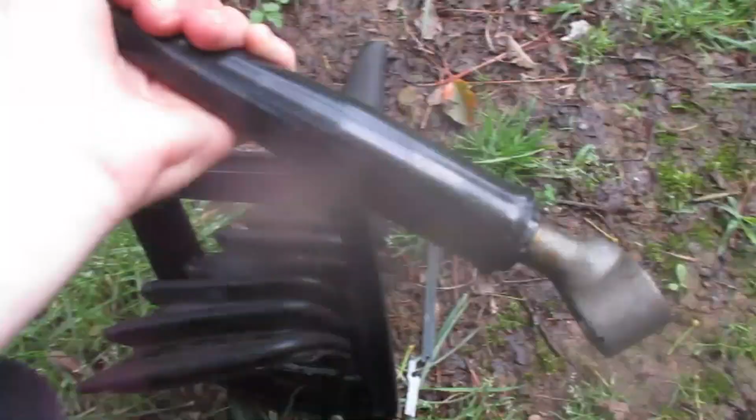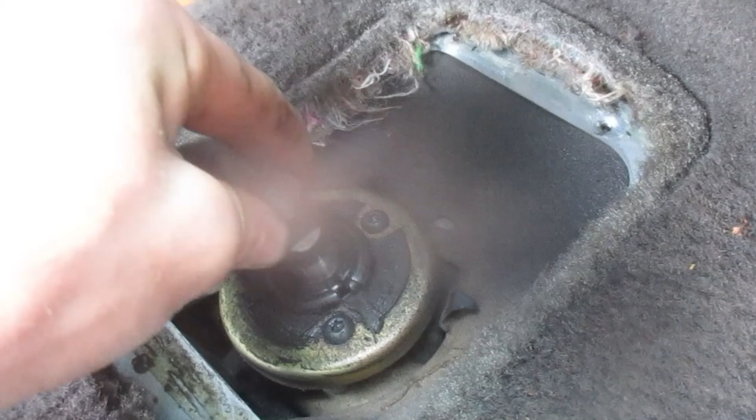And the shifter was attached with kind of an interesting system. Oh, so here's the rubber underneath the boot. The transmission, you can see it down there. Anyway, this goes on like, let's see. Why is it tipped like this? Am I doing it? Oh. Anyway, so it goes on like this. Yeah, look how sloppy. I heard there's plastic bushings in here. That's probably the problem. Look how sloppy that is. Probably just needs new bushings.

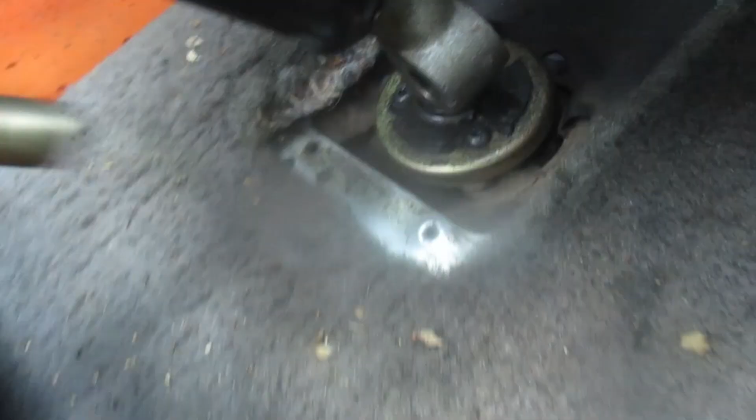Anyway, so this sits on there like this. And this bolt with a wedge on it goes in there and locks it on because there's a flat there. The bolt with the wedge was in there. The nut was on the other end, pulling it tight, but you can move the nut to this end to pull it back out. And then the shifter comes off. So there we go. And I suspect this is a problem. See how sloppy that is. Got a cracked little thing here. And there's the pivot on the transmission.

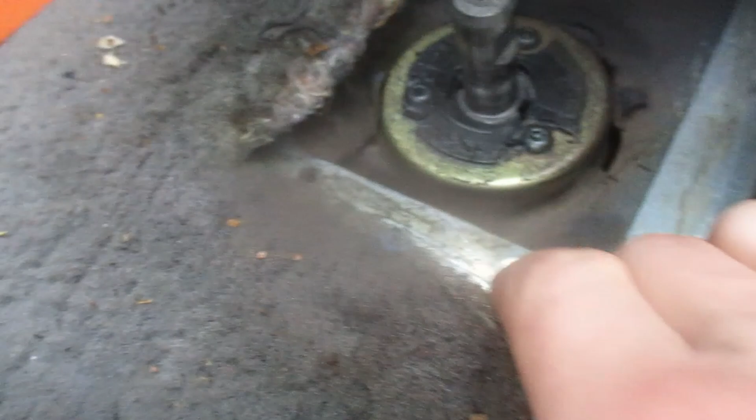Yeah, that is pretty bad. This might be why it's not sitting. We have got a plate down here though, so I'm not sure how much we can do without pulling the transmission out. No, it's a bolted on plate, actually. I'm gonna get off this carpeting. And possibly that plate will provide enough access. I'm not really sure. Let's see.

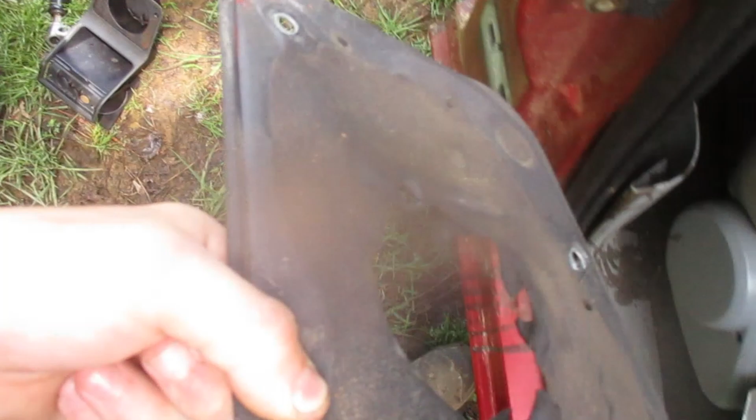I got the cover off. The one right there, I think that must be the transfer case lever hole. I'm not sure. I was thinking I would be able to get to it, but I just got all this here. The plate reaches more into there. We really should have put it more here, because we can't really pull the plate off unless I can just access through this little spot. Else I'm going to have to drop the transmission. Problem with that is I don't think I can do that. Not by myself, anyway. So this could be pretty problematic, but I'll see what I can figure out.

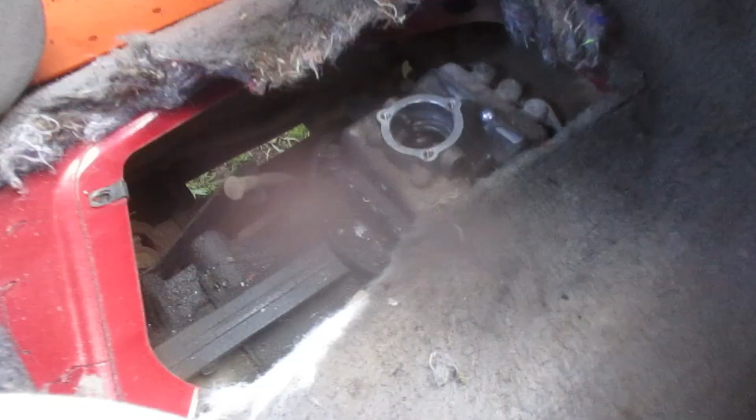So I got that piece off, and I really can't tell. There's no way to get this cover off without removing the transmission, so I guess I'm going to pull it out in a little while and replace it. Get another good used one and put it in. It's no big deal, but I'm a little disappointed.

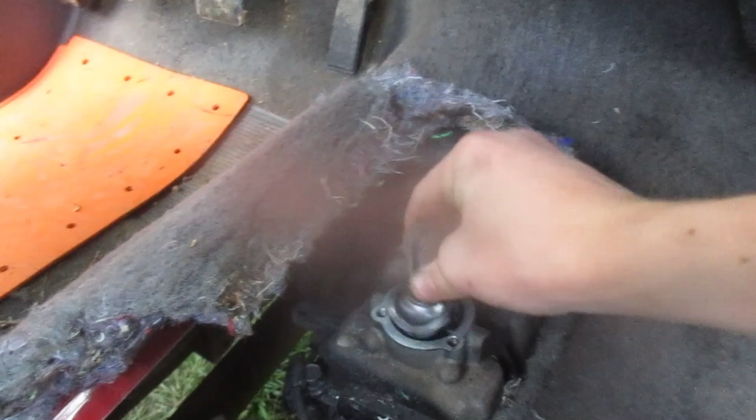I stuck this in here and then screwed down that on top of it and just started hitting it with a hammer, and I got it broke loose. The oil's really low in the transmission. I'm going to change it and see, Lord willing, then it won't ever break up again. I'll just add the oil to the top. It's easier than using the fill plug. Have to get some oil soon, and Lord willing, this will fix it.

I got some oil ordered, and we won't be able to listen to it tonight, but I'm going to go ahead and put on my custom exhaust. You know, the cheaper they are, the better they sound, so this one ought to sound pretty good, because I think it was so cheap. Yeah. I can't tell if it's good or not. No flex pipe, I'm not using any of that. I don't want it rusting like those are supposed to do.

Okay, let's start by getting my empty catalytic converter / adapter thingy. That might actually muffle it a little, which would probably be good, considering that it's area for the gases to expand or whatever. Let's go and get it clamped onto here. There's a 2 1/4, so it'll fit right inside it.

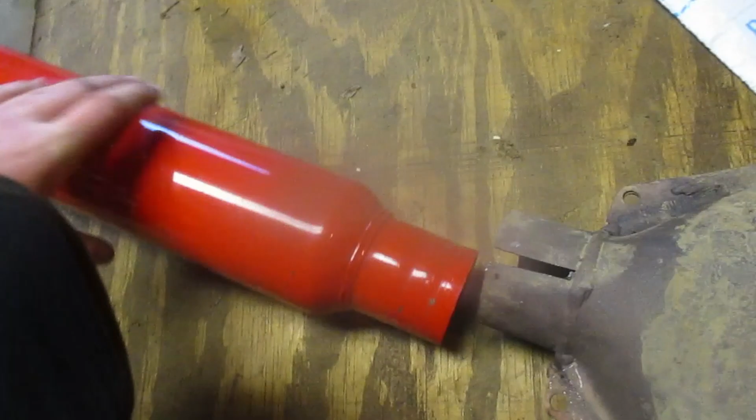Here we go, got these clamped together with this old clamp. It originally went right there, actually. It has that hook for hanging it on the hanger that's over there. So I got this glass pack from my cousin. It's 2 1/4 diameter, but that turned out to be good because it fits inside there perfectly.

I cut a slot here. Good thing I did. See how much it's closed. And it's clamped on there real secure, so we got a straight through exhaust. With an echo box there that'll actually quiet it down a little bit, and the glass pack to quiet it down some more, and it all sounds pretty good. So I need to figure out how this all is going to go together, I guess.

For some reason that hanger didn't line up up there, but it's no big deal. This, I believe the gasket's still good, so it shouldn't leak. So let's see what we can do. Got it in place. It's so tucked up in there, somebody randomly looking under there wouldn't even notice it. Let's see. I use my camera as a handy viewer. Let's see.

There we go. Now we put this in right here. And we got an extension here. That's not even the noise it makes. Anyway, let's see. So after this, we'll have it like this. So, supposed to do it like this and not use that. Like that. Maybe. I don't know, let's see.

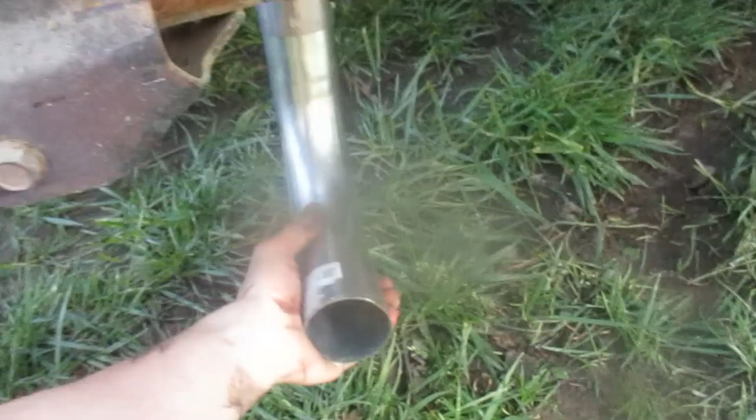See if I can put this on underneath. I'm not sure, I might just reduce my ground clearance way too much. Wait a minute. Yeah, that would certainly. Some cutting is definitely in order. Or I could just have it be like a Honda Civic or something when it's sticking up, except that this is the side. So, anyway.

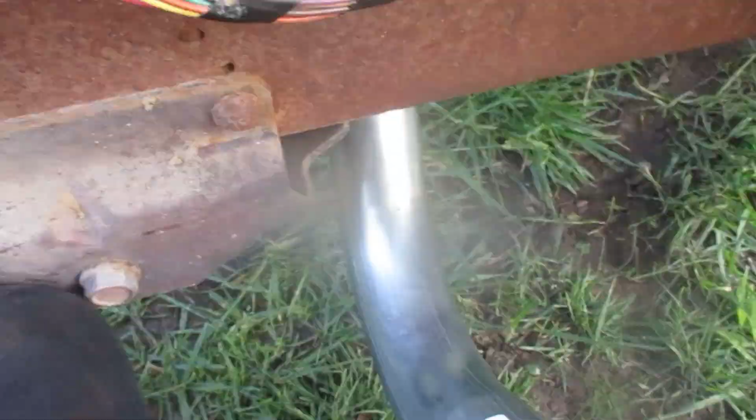Let me see, I thought about just not having this one, and just having the one behind it just dumping out down there, but I'd rather have it come out a little further. What I really should have bought was a 45-degree angle, so I could have it come down like that, and have it come out, yeah. I should have had a 45-degree angle and not 90. That's it, I guess I'll have it come out like this and then just cut this one at an angle like that, and that'll be the end of it.

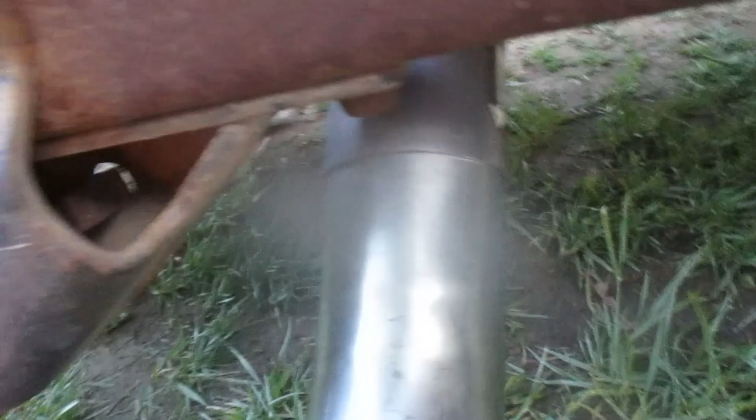Alright, that ought to work. Guess I might just screw it on. I don't even know if there's any point in wasting a clamp on this. Of course I have the clamp, so I may as well use it. I also need to figure out some way to probably hang the exhaust pipe right here, I guess, or something. Alright. Well, that looks pretty sporty. I just need to bolt everything together now. We won't know how it sounds for a couple days, but I've got the exhaust system installed.

So, it's a little loose at the connection between the fake catalytic converter and the glass pack, where I used that whole clamp. I think it's tight enough. Time will tell if it holds up for sure. At the back, we needed to make sure that we had an exhaust hanger, so I used the proper kind. This is the orthodox traditional exhaust hanger. Also known as a coat hanger. Hangs good, and it'll blow out right there.

That is stupid muscle car noises. Oops, I shouldn't have said that. I'm very, very sorry. Yes. Anyway, yeah.

So my curiosity got the best of me, and I decided to go ahead and see what the Explorer sounds like. And it sounds pretty good. It's not real loud, but it sounds good. I didn't want it being real loud and obnoxious anyway, so it's perfect. Sounds sporty. All the exhaust is blowing out the pipe. Isn't this a sporty exhaust pipe? And all the exhaust is coming out of it, feel it.

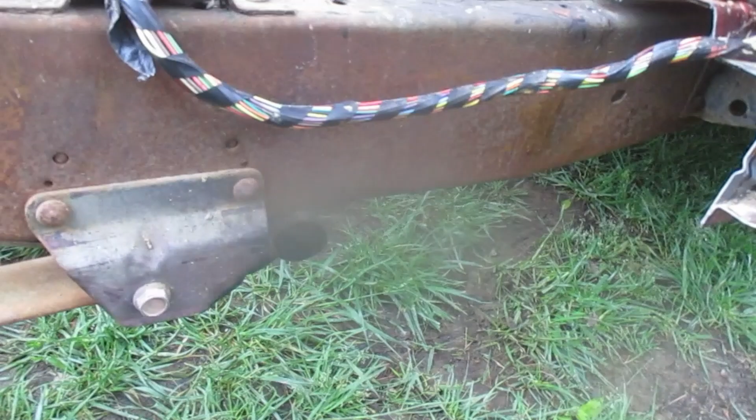Harry's got some parts. And here is his good pal Carlos. Carlos is a Chevy Express. Doesn't he look great? Anyway, let's see. This is our first shipment. Cardone. We build it better. Remanufactured unloaded power brake booster.

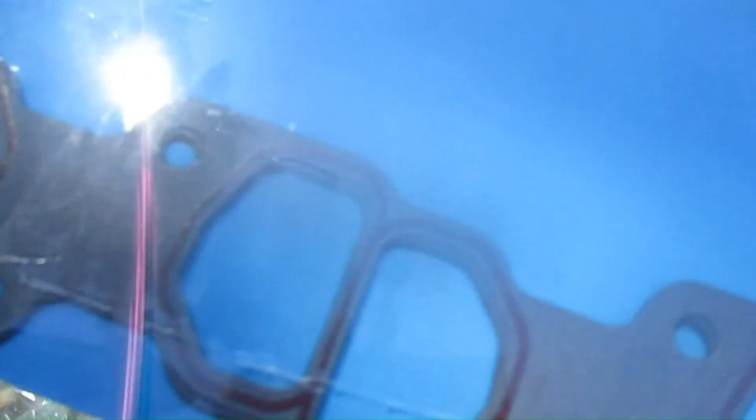How is it unloaded? What is this? Oh, this is gaskets from when I replaced the fuel injectors. And this is a repair kit for my shifter. Let's look at our brake booster.

Why is the box so big? Here's our... warranty void if check valve is removed. Good to know, I wasn't planning on removing it. What? Failure to replace the leaking master cylinder will void warranty. That's a good idea, I think, about that policy. But my master cylinder isn't leaking. Here it is. Cool.

What is this plastic for? We got more warnings in here. Check. I've not got 1.5 hours. I don't know if it's gonna take that long for me. And what is this? Warranty void if unit is contaminated by gasoline fumes. I haven't got rich mixture. So how am I gonna do this?

I was in the middle of trying to figure out why my radio is having all these issues, and then now all this stuff shows up for Harry. Harry is the name of the Explorer. Well, I'm just gonna get distracted and start working on Harry. There's our transmission. I'm just gonna add the oil through the hole in the top. It'd be easier than doing it through the side when I give it a change.

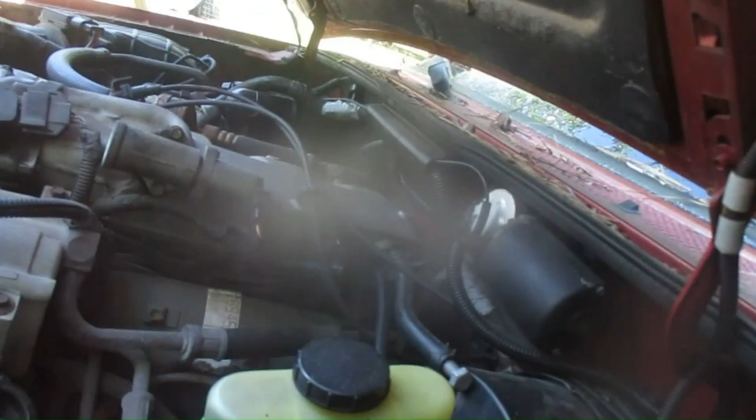Pop the hood. There we go, my hood is open. Yeah, let's get started now, I reckon. Get started with replacing our brake booster. Fuel filter just showed up. I need the injectors and the fuel pump to show up, fuel pump and sending unit assembly, and then we'll put them on. I'm running out of time. I'm grateful I got all this stuff I need to put on.

I am gonna go and fill up the transmission with oil and install the shifter kit before I put on the brake booster. Do that, then the brake booster, and then what was the other? Oh yeah. I don't guess I'll be able to do anything more on him until tomorrow, apart from drive a little. I don't know how much gas I got left in there. Probably not much.

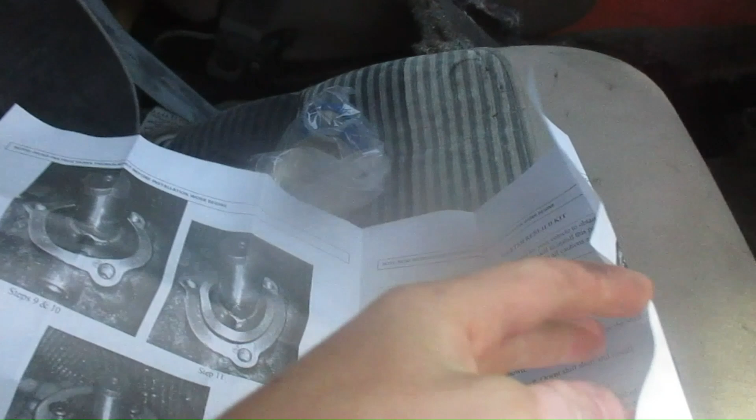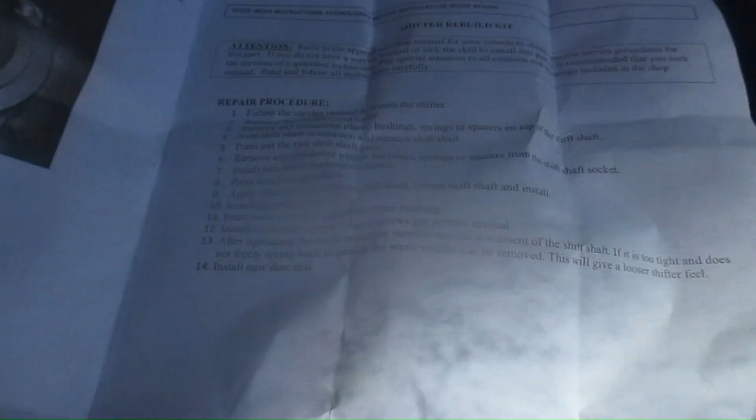Okay, let's get started. First I need to put in all the fresh oil. I'm not going to bother with replacing those pins, so we'll just flush it out. Got some fresh Mercon LV automatic transmission fluid. Doesn't make any sense putting automatic transmission fluid in a manual, but it's what you're supposed to do apparently. Pour a little oil in through the top and it's dripping out the drain. You're supposed to add through the fill hole. That'd be really hard. It'd be much easier filling from inside, and then I'll just fill it till it starts dripping out the hole. And then put together the shifter rebuild kit and put the shifter back on.

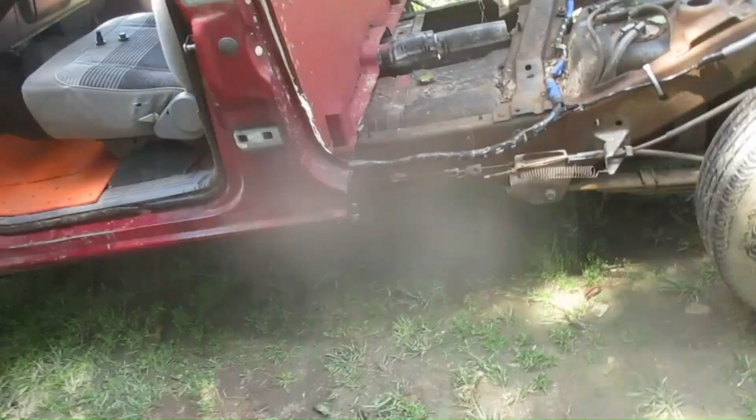Long run, the transmission will be fixed and I'll get a while out of it, a couple more 100,000 miles. So I expect I probably will. These are great trucks, great engine, great transmission. Only seem to have got like 1.5 quarts out of that transmission. It was really low. I looked for oil seepage on it though, and I don't really see any. Unless the front seal is shot, that area in the engine's pretty wet.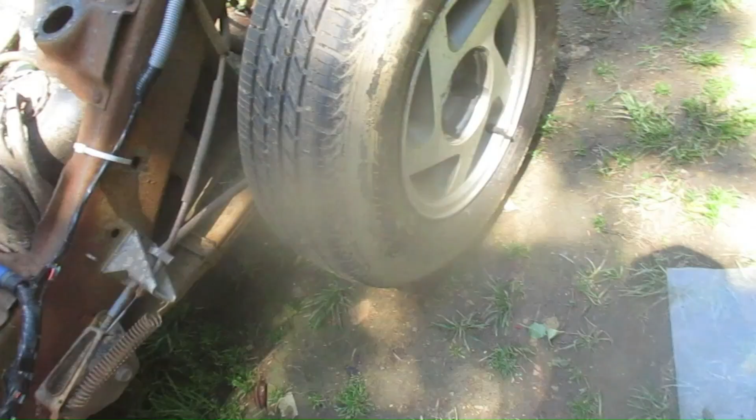Well, that's not the case. That would not be easy to change. I don't see how I get this thing pulled apart. Have to pull the engine out, probably, because it's not easy to get the stuff under here. That's a fact. I felt some, then stuck my finger in and felt, and it was almost full. And then I put in a little more, and went back and it was running out the hole, so hopefully it's not really overfilled.

I put the cap plug in. Filling it from the top makes it easier to access it, and that wee bit of oil I put in ran over the shifting stuff like that. It's at the top, it's filled up, it's good. Okay, let's put the cap on the jug. I need to get me one of them pumps used to fill it, because I think the transmission must leak a little.

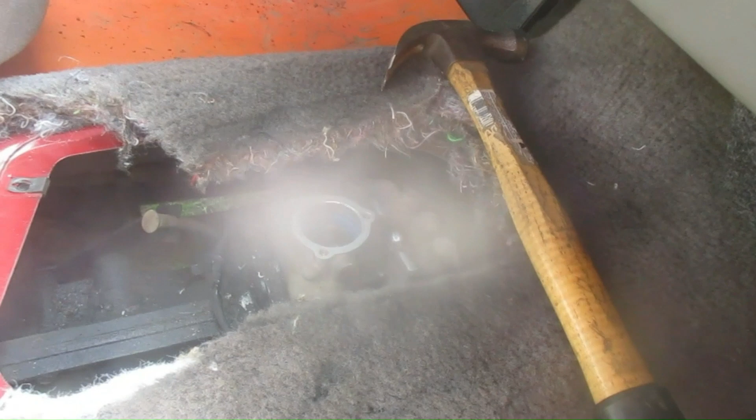Since I can't get those pins out, really, it was kind of tricky to get at that and get that into there, but I was able to bend it into there without hurting it. Okay, where's our shifting ball? Yeah, this pin's not really worn anyway. Let's see. I can go in there like this. So I slop it in, it's just to grease it a little. I gotta go find some. Maybe just put some oil on it.

In the upper bushing in this spring, it says to take this spring out if the shifter feels too tight. And then we have a new plate to put on. Alright, so that boot was already coming off, so I just took it off and put that back down to help hold down the carpet. Can't really tell it was cut, I don't really care. And here we have our shifter. It shifts pretty well. Big improvement for sure. I cranked that. Alright, that's sporty, ain't it? I need to get my console put back in.

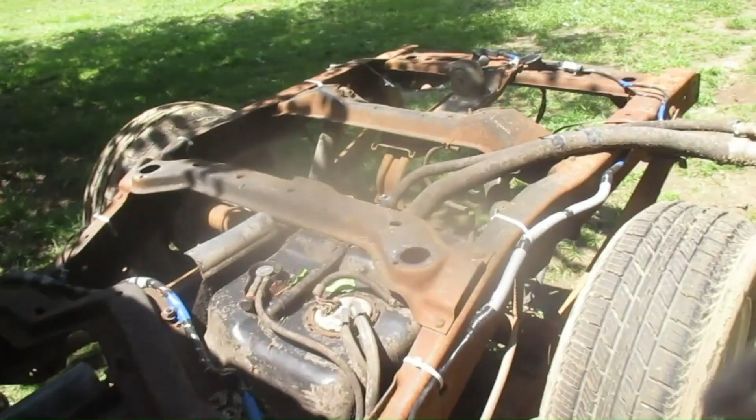Alright, so I finished the interior reassembly. Now I'll move on to replacing the brake booster, and after that, we'll do a little test driving. And then, Lord willing, tomorrow, the rest of my fuel system components will be here, so I can fix up the engine and get it running good. And then if he runs real great, it'll be probably pretty much. I might have to replace a couple more things, and then it'll be flatbed time.

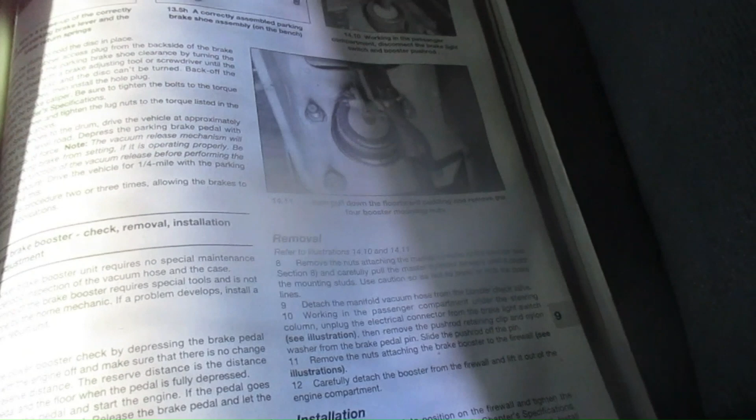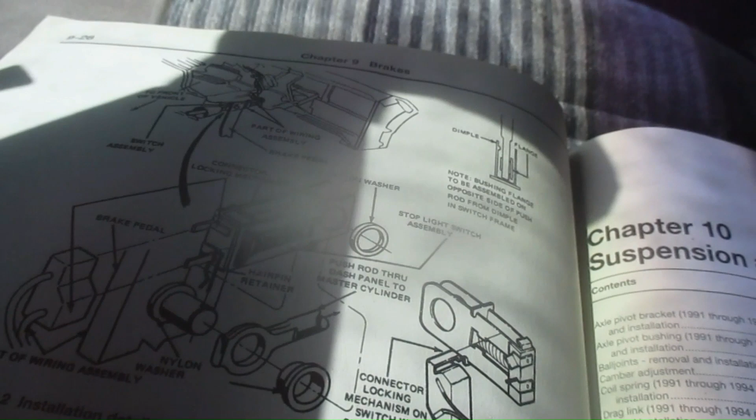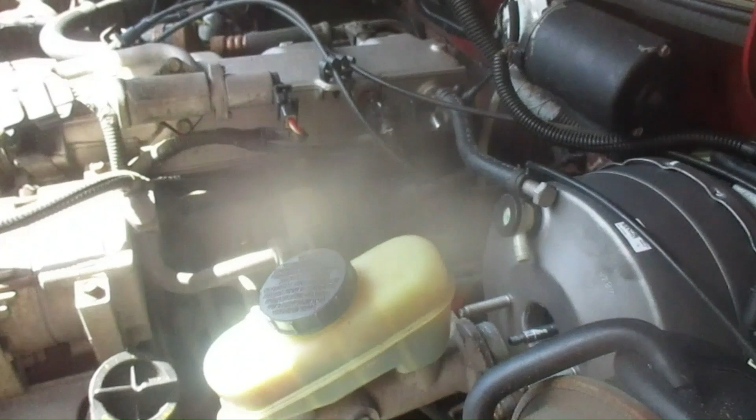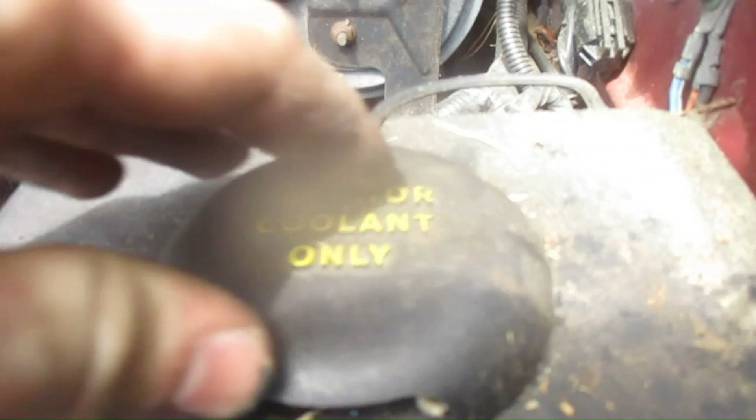Now it's time for a test drive. Of course, I need to do all the engine work, but I don't have those parts yet, so I want to make sure that what I have done is working good. See, we still got some coolant in there. This oil is good. Yeah, it looks good. There. Hey, that's something good. That'll be alright.

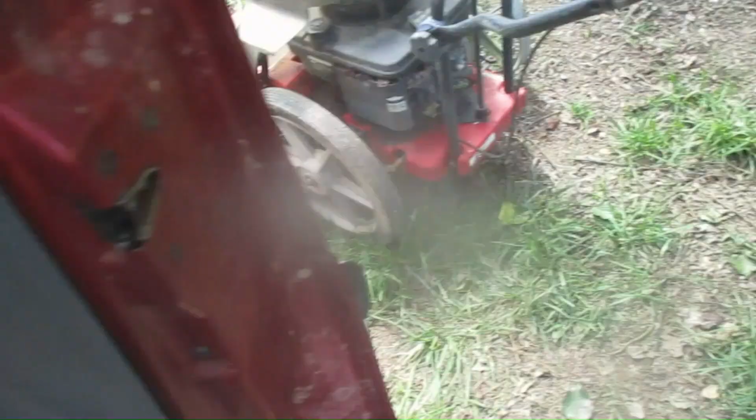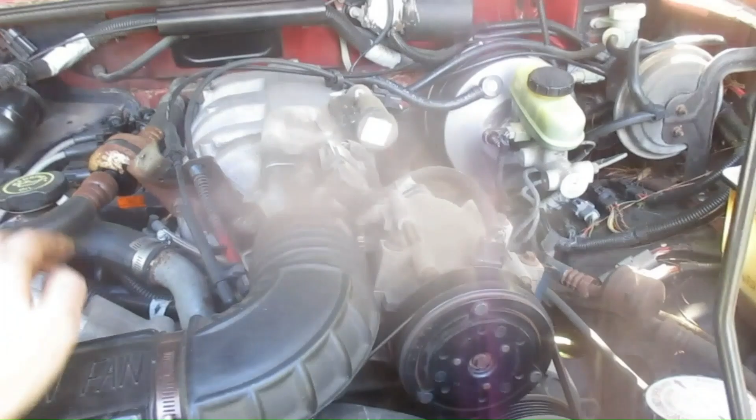Well, my brake booster will boost the brakes as it should. Our transmission will shift as it should. Of course, I can't make video while I drive, so I'll tell you the result. Harry just been for a ride. Even without new fuel injectors, he rides pretty smooth. So I guess with the new fuel injectors, he should run even better. Sounds very powerful, and he only has 155 horsepower. The good old V6. I like it.

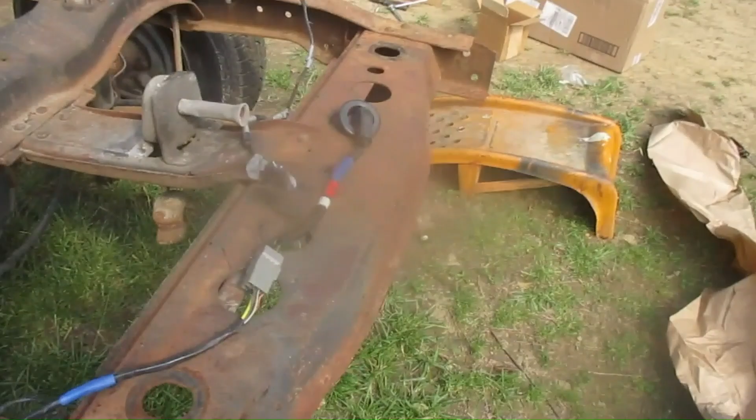There's the fuel injectors in a container. He seems to shift pretty well. I was going up the driveway and my shift knob flew off, so I had to glue it back on. But anyway, he shifts pretty smoothly. It sounds a little grindy, I noticed, but that don't mean anything real bad. Let's see down there. We don't really see any seepage from the transmission, it don't look like. Well, it's alright. There's a lot of oil seepage here, so we probably ought to keep an eye on the oil in there. Well, seems good overall.

Thankfully I remembered this. Praise God, I remembered before I took him for a drive. But the clutch pedal had fallen off the push rod up there. I put a cotter pin on it. I guess it doesn't have any bushing in it, so it's pretty sloppy. Like the bushing's just long gone. And I expect it should have had something holding it on, of course, but it's gone now. I just had the cotter pin that I put on it.

Fuel injectors. I think that I probably should not be opening them up in an unsanitary place like this.

Hardly even need new fuel injectors, as best I can tell, but I think you probably would benefit. Fuel injector, return all units in this box. Yes, I will. So look at one. They got it packaged up real nicely to keep it dry and safe. Here we have our fuel injector.

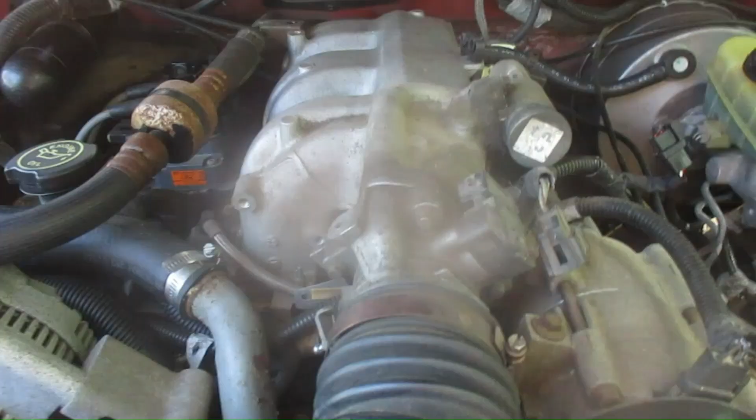I'm getting the intake manifold removed. There's 6 bolts, nuts, that is. So you gotta take out one there, two there, and one back there. That one back there is tricky to get out, but with the right socket setup, you can get it out. And I had to disconnect the connector there, all those hoses.

And of course this hose, a hose down there, that little one, you can probably see it. And I had to disconnect, unbolt that, and there's some loom holding some of the spark plug wires to the back. You had to pull those off and unbolt the ignition coil from the intake manifold. Hoping I can get it off without having to take off the bolt down there. I cannot get that one loose. It's gonna be tricky pulling it off.

I'm sorry my camera gives such a fuzzy video. We're gonna have a shot at pulling off that intake manifold now. So you can see much of nothing. It's loose, but it's not actually coming off. Let's see. Got a little clip here holding a wire I didn't notice before. Yeah, it's mostly the coil pack blocking me from pulling it off. The position it's in, I can't get the bolt out that holds it.

Is it gonna be easy? There's no way it's gonna come out unless I take the coil pack off, or at least bend the bracket. I can't tell if it's a metal or plastic bracket. I don't know. It's got that bolt down there, but it holds it to the exhaust manifold, so it's not gonna be easy to get out.

Before I forget, I depressurized the fuel system. There's a switch down there. You disconnect the plug from it, and then crank the engine. I got the coil pack bracket bent. Maybe it'll work now. Still not wanting to come off. So many obstacles.

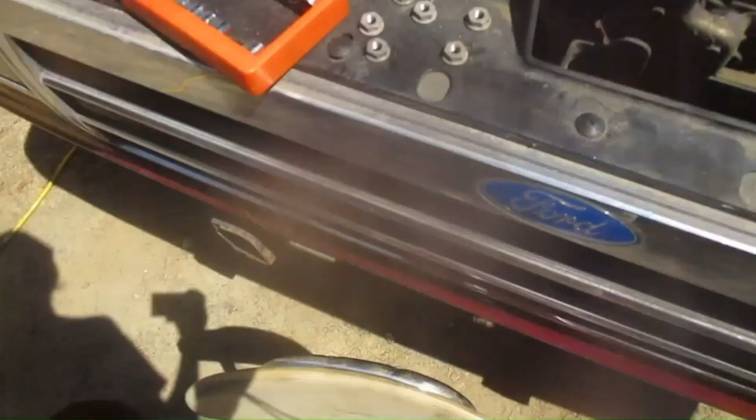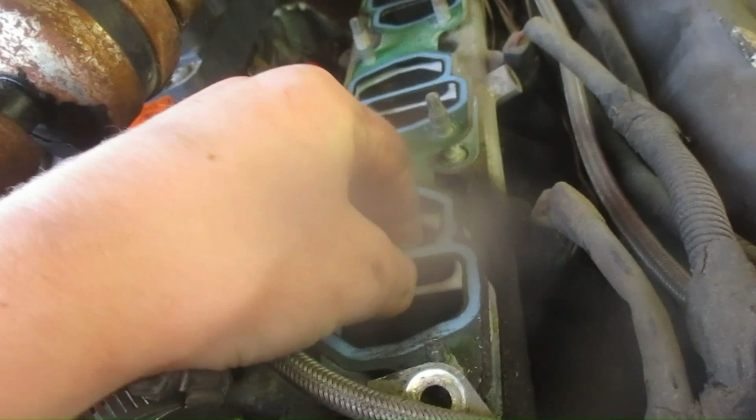Finally managed to get the intake manifold off. There's some carbon in here. Well, it's good, I'm grateful. Gasket sure broke cleanly. Looks like it'll come off easily. Yeah, very easy. I mean, we could reuse this gasket, but I have the new ones. Scraping is necessary, so I'll just go ahead and do that.

Oh man, that was a tough job. Air conditioning line's really in the way. Alright. Take the old gasket, we got fresh ones. Now, let's see. Don't want that debris going into there. This had a little rubber cap on it. I dropped it down here somewhere. I don't know if it'll turn up now or not.

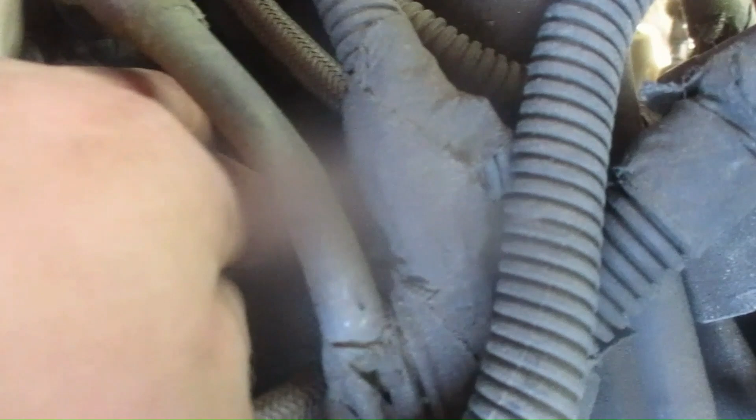Now, how this fuel rail is attached exactly. Let's see, well, there's the injectors. You can see the connectors there. So there's the fuel pressure regulator. I'm not replacing it because as far as I know it's still good. Let's go look at our instruction book.

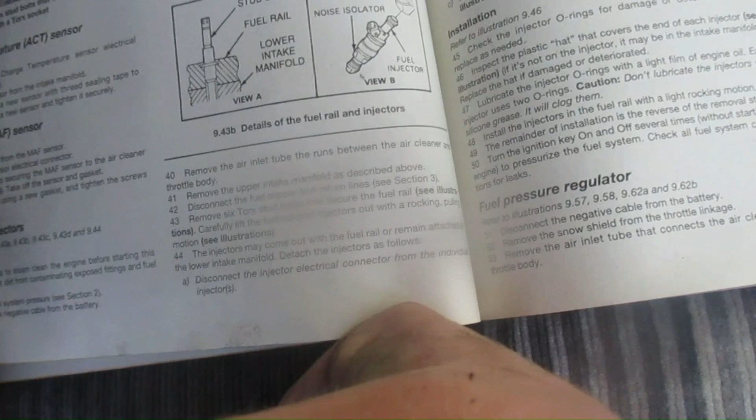Here. Note the cap over the front stud. I hope it's no big deal that I just lost that. Yeah, fuel rail and injectors. Good, doesn't look like I have to take off the intake manifold, just take out those bolts. Move the intake manifold, remove the bolts, and walk everything out. Okay.

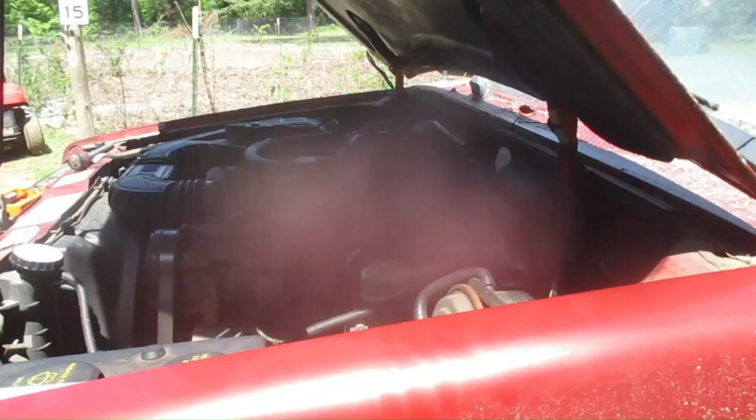When do I disconnect the connectors? Once I pull it out. These are Torx bolts holding on the fuel rail, but I'm using a 7/32 socket to remove them. And it seems to be working.

Maybe not. It slipped. Let's see. So I'm using vice grips to take out each Torx bolt here. Well, I use vice grips to get them started, and then I use the socket to take them out the rest of the way so they don't strip.

Here is the PCV valve. I know you're supposed to check to see if it rattles, not to see if it shakes. Rattles pretty good, don't it?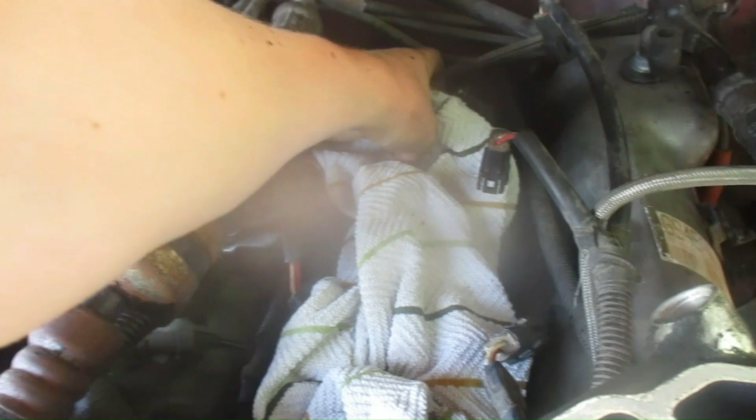Okay, so I pulled all the injectors out and disconnected the wires. Unfortunately, I broke the clips on one of the connectors that help make sure it don't come off. Hopefully that connector won't fall off and then I have a dead cylinder. I don't think it's likely to happen. Hopefully it won't. And then I sprayed everything off the best I could with compressed air.

Tried to make everything as clean as I could. It's still not the best. I mean, a little teeny bit of dirt getting into the engine is not a big deal, but dirt getting into the fuel injectors is. Everything looks decent. Well, then I'll be alright.

Okay, so let's read the instructions again. Go away, wasp. Don't go in there. Stupid wasp.

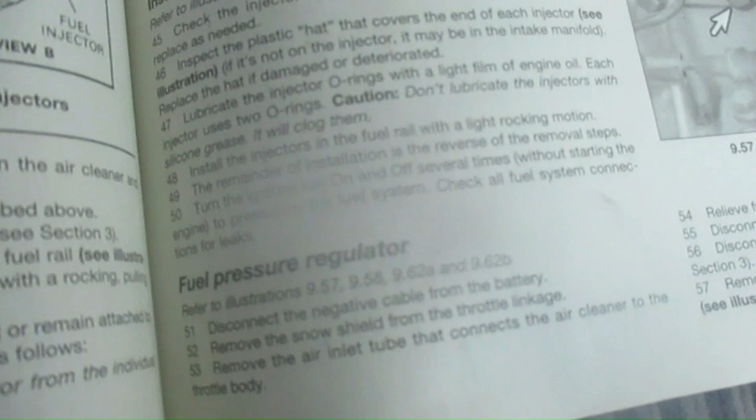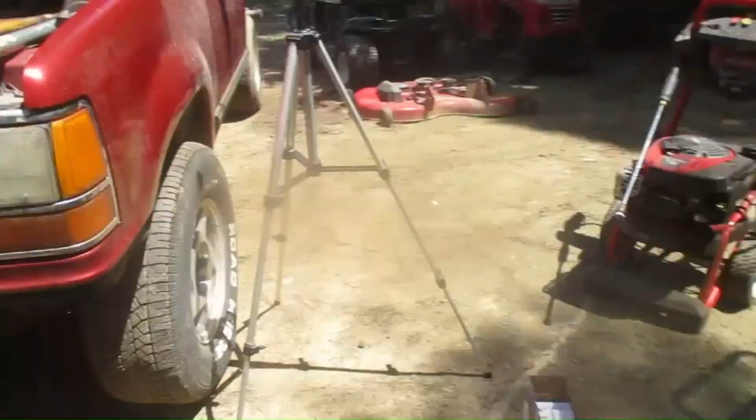Let's see, so we need to lubricate the injector O-rings and put them in the fuel rail and then install it. Okay. I don't guess I'll really make any video because it's kind of difficult, and this is a precise job. I pulled out all the old injectors and then got a quick shot of air in each hole to make sure that they were all clean.

Here's the old injectors. They are really dirty. Probably 450,000 mile injectors. So I'll put these injectors in. Of course, I won't run it again until I get the new fuel filter and pump installed. I have the new fuel filter, so as soon as I get the injectors done, I'll put in the fuel filter, pump, and sending unit. Lord willing, they'll show up today.

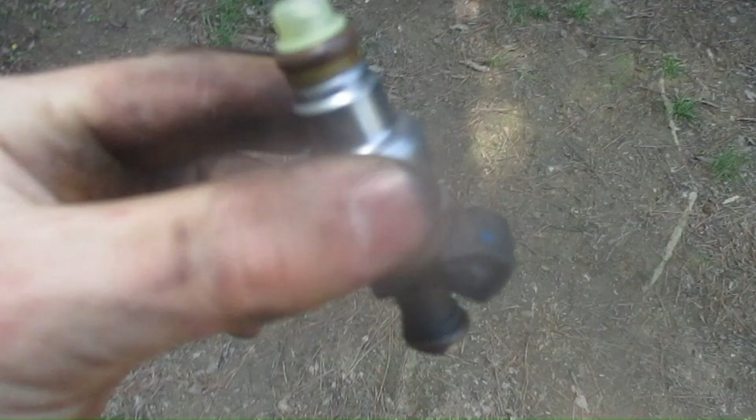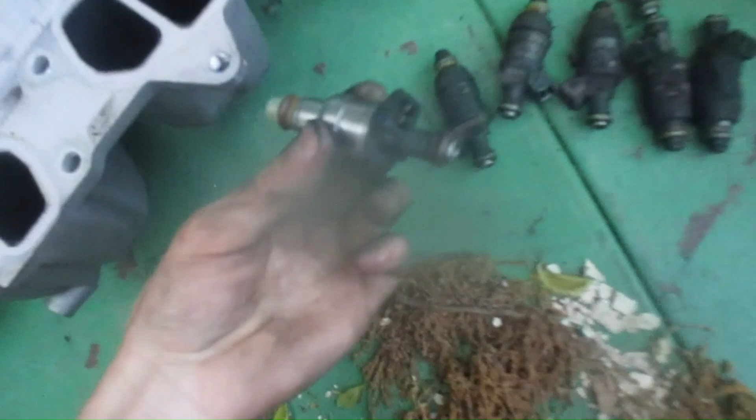This is exciting. There's a reason they say handle injectors with extreme care. My camera is so fuzzy, it won't even hardly show that little tiny needle nozzle on there. It certainly is a remarkable little thing, ain't it? Here it is. Looks the same. Good. I mean, not quite the same, but almost. I'll go and get them all put in.

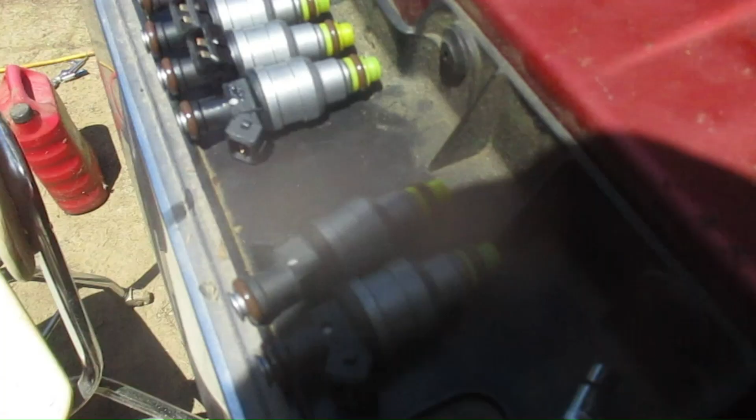Beautiful new fuel injectors. Thankfully the old gaskets came off easily, so I'll be able to put on the new ones. I'm not gonna make any more video until I get them in, because they're very fragile, easy to clog little things. I realize these rubber noise isolators are supposed to transfer to the new injectors, but I've already got everything mostly put together right up to the intake manifold. I am not bothering with putting those pieces of rubber on.

Those vibration isolators that I left off, hopefully that won't cause any problems. No, they said noise isolators. Hopefully the fact that I left them out won't cause any problems. Everything's put back together though.

Supposedly, Lord willing, my fuel pump is out for delivery and the spark plugs too, so maybe they'll show up and I can get them put in shortly. It's about the right time of day for FedEx to show up. Go and put in the fuel filter while I wait. And Lord willing, my little hairy pickup will run great.

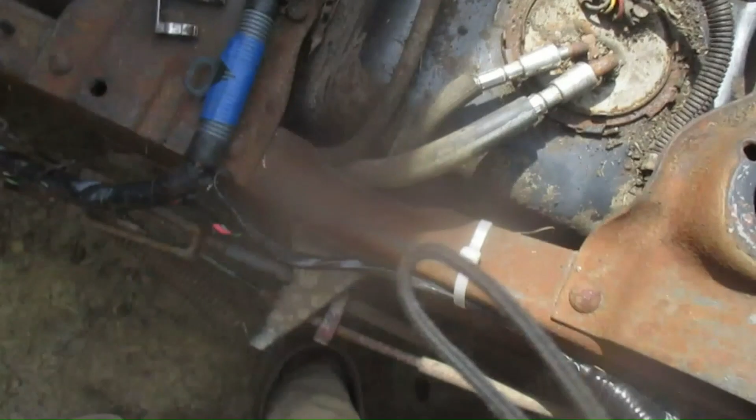So, it turns out you need a special tool to disconnect these fittings. So I'm going to have to stop working till tomorrow, or longer potentially, but Lord willing, I can find the tool I need tonight at the auto parts store. This is quite disappointing, really, because I thought I'd have that truck running today.

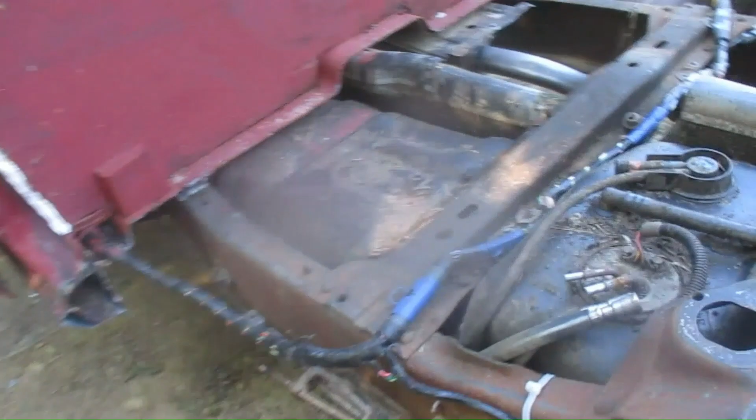Picked up this tool yesterday evening, and this morning we have gotten the fuel lines disconnected here. Now I need to replace the fuel filter before I work on this anymore. At least I got the tool now. I got the fittings apart and I broke one of the insides of the fittings by mistake. Well, my dad's gonna stop and get some new fittings at the auto parts store.

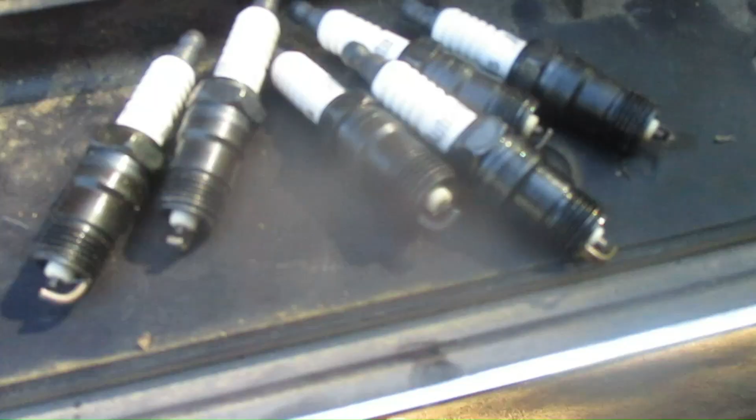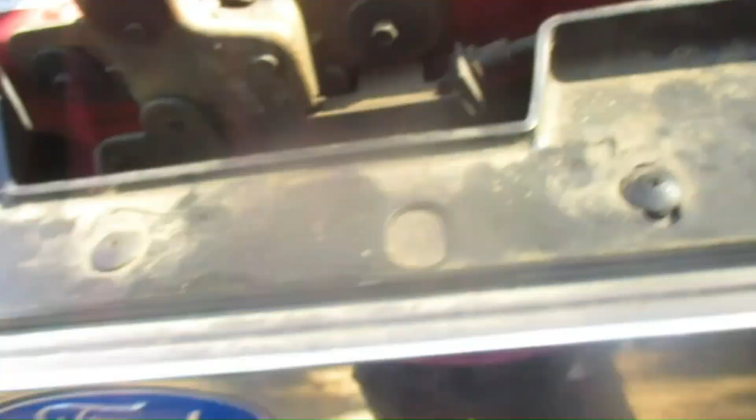But while I wait, I'll replace the spark plugs. Got some new Autolite 765s. I ordered 8 in case I broke a couple of them. And one of the ones I opened up was a different color. It was still the same spark plug, but I found I have at least 6 that are all matching colors, so I'm going to use them. Now for the immensely difficult job of changing spark plugs.